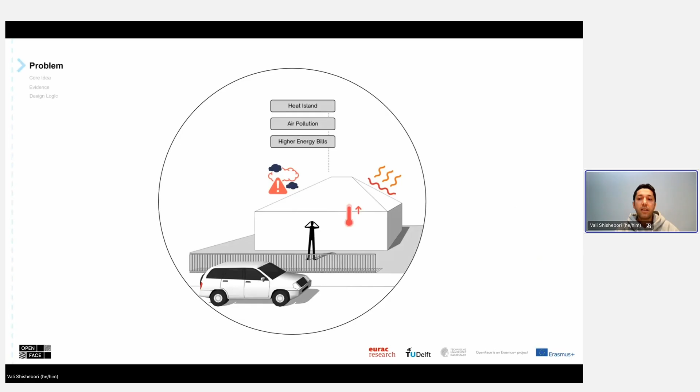This diagram illustrates the core concept. I propose the front yard as a living environmental buffer zone positioned in front of the facade. Vegetation is not only landscape, but an active environmental layer that modifies solar exposure, airflow, pollutant transport, and the near facade microclimate. The concept is informed by both field measurements and environmental simulations across the street, yard, facade, and indoor. This reframes vegetation as part of environmental performance, not just aesthetic.

To evaluate this, I used validated ENVI-met simulations, comparing vegetated and non-vegetated conditions. The results show a clear reduction in facade surface temperature, along with lower shortwave radiation and sensible heat flux. This improves the thermal conditions around the building and supports better indoor environmental performance. More detailed results are available in my published indoor air study.

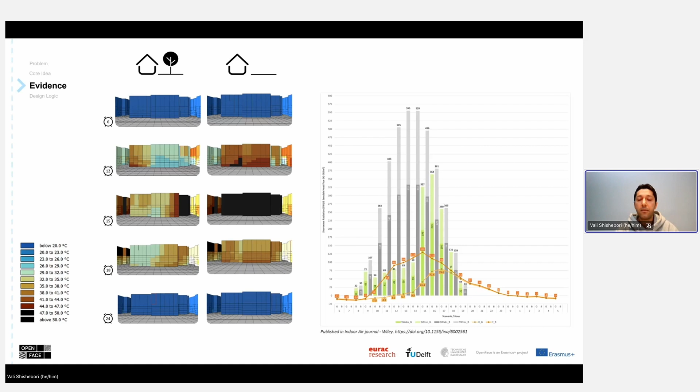Finally, the concept translates into design guidance. Vegetation strategies should respond to orientation, solar exposure, prevailing winds, and local microclimate conditions, allowing different configurations for different yard directions. Overall, this research suggests that facade performance is not only determined by the building envelope, but also by the environmental system surrounding it. And that's it. Thank you.

Okay, this was less than 5 minutes. Do we have questions for him? Any questions? No questions. How do you relate this to your climate, to your local climate?

Actually, in my case study is in West Melbourne. So the prevailing wind and the sun exposure are the most important climate conditions here. I just simulated the house facing the north side, because the most solar exposure will be in the north, as we are in the southern hemisphere.

I think that the sun and the wind are the most important microclimate factors here.

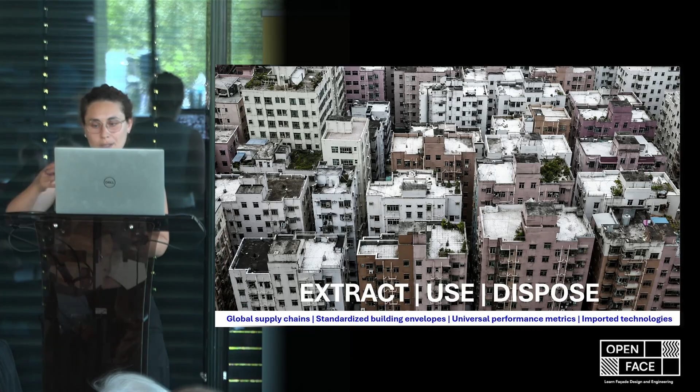So my question becomes: what if, instead of extracting building materials, we could grow them? This is where my research begins. My work investigates how mycelium-based materials can be developed through a bioregional design approach for the built environment. Mycelium, for those who don't know, is a root-like network of fungi, and when combined with organic substrates, it can act as a natural binder, transforming waste streams into lightweight, biodegradable, compostable composite materials.

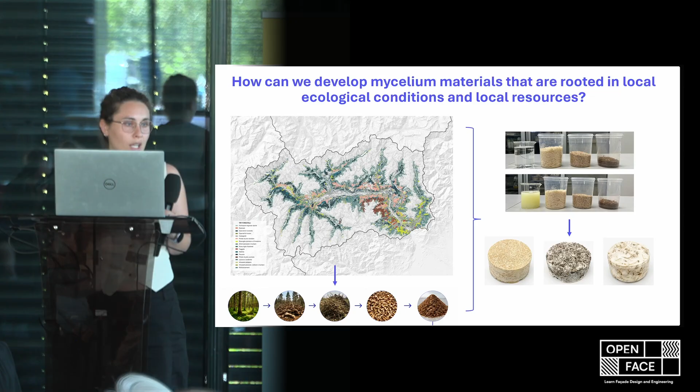Most research today focuses on material performance assessment of mycelium composites. My leading question, and the gap I was able to investigate, is how can we develop mycelium materials that are rooted in local ecological conditions and utilize local resources? To answer this, I developed an adaptable workflow for localized biofabricated materials based on bioregional design principles.

The workflow begins with material mapping at a regional scale, identifying locally available organic resources, including waste streams, byproducts, and virgin biomass. In parallel, it focuses on harvesting local fungal biodiversity through sampling and isolation of endemic fungal strains, and on finding local available nutrient sources to support fungal growth.

These bioregional inputs are integrated into a biofabrication process that includes substrate preparation, inoculation, mycelium growth, molding, and processing to produce composite materials. The outcome isn't a single material recipe, but an open and transferable protocol that can be adapted to different bioregions according to their ecological conditions, available resources, and local knowledge. By shifting focus from global material supply chains to locally rooted production systems, this approach could support circular, decentralized, and regenerative material systems for the built environment.

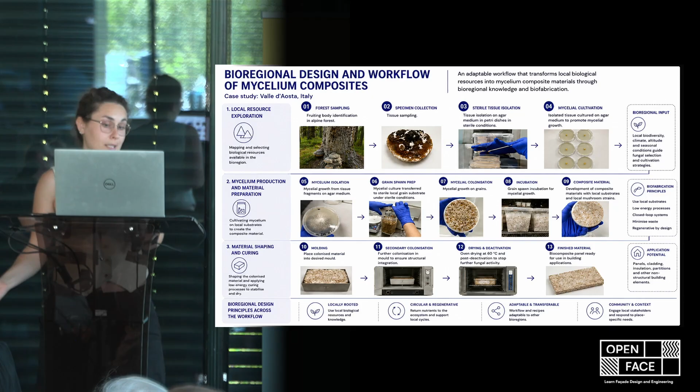I did bring some samples that follow exactly this protocol that I developed by utilizing local resources from the bioregion of Valle d'Aosta, which is in the northwestern Alps in Italy, and local fungal strains that were isolated within the lab. So these are the...

There's a question—of course, Marcel has a question on fungus. Thank you very much, very clear presentation.

I was wondering, did you already find big differences based on where the species are from? So regional differences—if you go higher in altitude or more south for the climate, do you see changes in the performance? The performance is yet to be tested.

The idea now is at the early stage of assessing that you can utilize fungal strains that are not the most researched ones in academia, like Ganoderma lucidum, Trametes versicolor, Pleurotus—also because these are always using the same strains, and they're also patent protected. So the idea to shift toward different material, different strains that you can find in local bioregions, is that you could potentially not only grow them, but also commercialize them utilizing bioregional resources. So there are some differences.

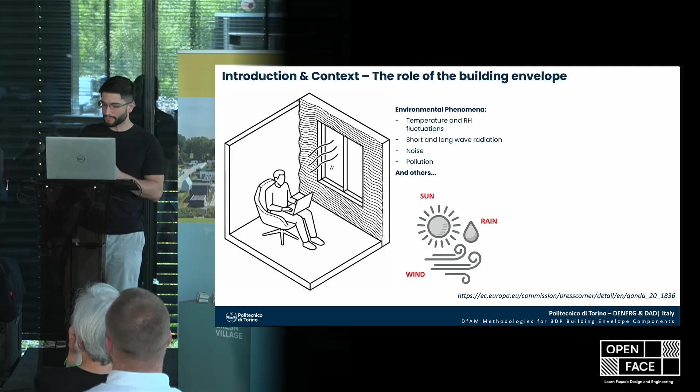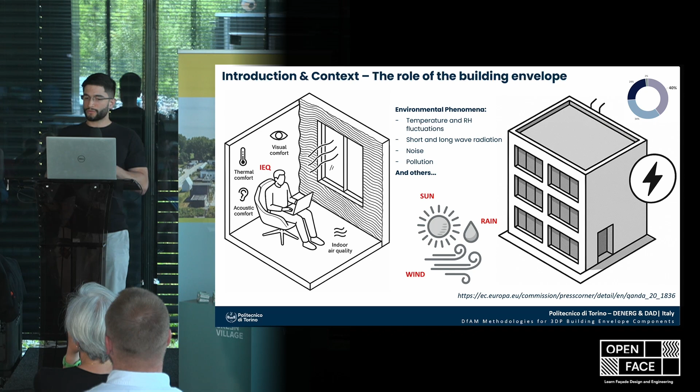In my research, we know that the building envelope is one of the key building domains, as it has to deal with environmental phenomena like the sun, rain, and wind. The way it reacts to these phenomena is very important because it will affect the user's environmental quality and also the energy needs of buildings.

Some of the most critical aspects in how we make facades nowadays is the fragmentation, because first we do geometries, then someone assesses them somehow, and in the end they consider the manufacturing constraints.

For this reason, during my research, I have been working on a free framework called Wasper 3DP, which is a Grasshopper plugin that helps designers make use of design for additive manufacturing methodologies, where you can have computational design, performance assessment, and fabrication all together in the same interface.

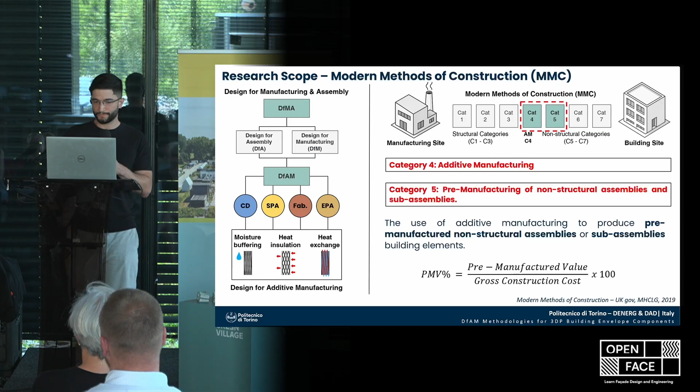So the main idea is not to have fancy shapes or new materials, which I think is important, but rather that we can give this complexity that is brought with additive manufacturing an actual purpose.

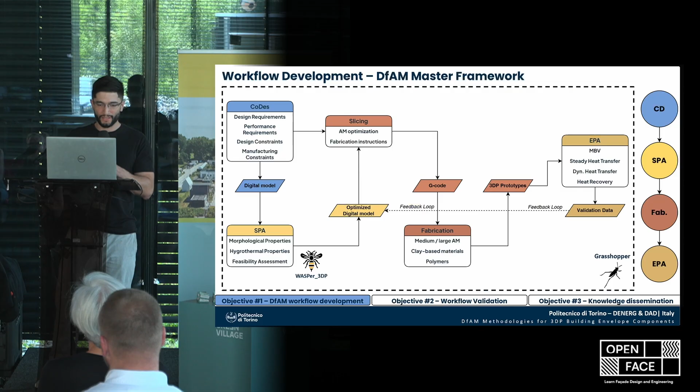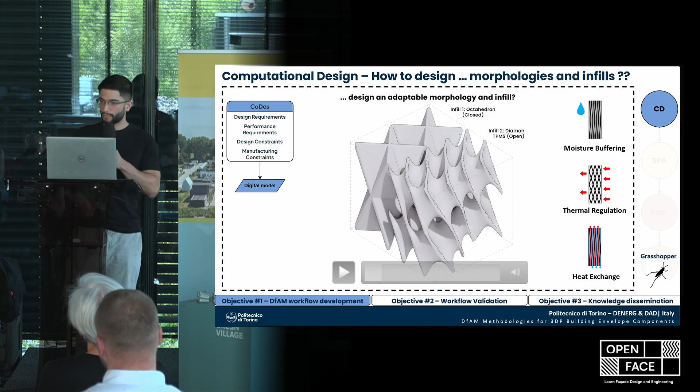Within a single interface, the user is able to manipulate complex geometries, complex infills, like for example the triple periodic minimal surfaces, which are being researched a lot nowadays. The user can also know some morphological aspects that can affect the performance of the elements, like porosity or tortuosity.

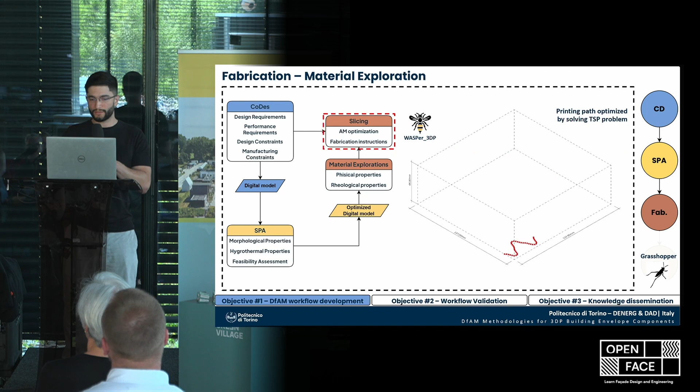In this case, the user can also use some thermal simulation methods, like some analytical and numerical methods that are embedded in the tool. And in the end, it can prepare it for the actual additive manufacturing.

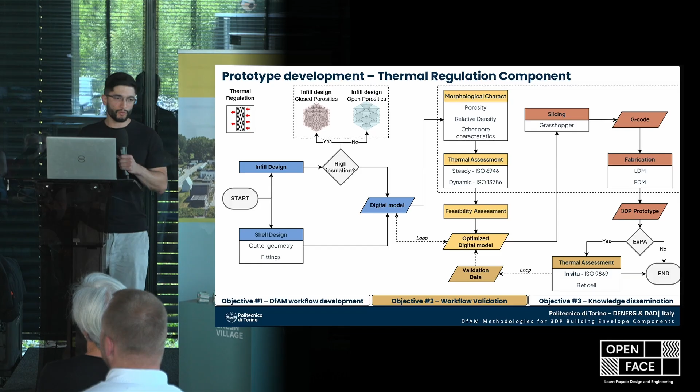Basically, the idea is to leverage these innovative technologies, which brings a lot of complexity to the table, so that we can really think about the actual key performance indicators, so we can measure the actual properties of this complexity we can achieve thanks to additive manufacturing.

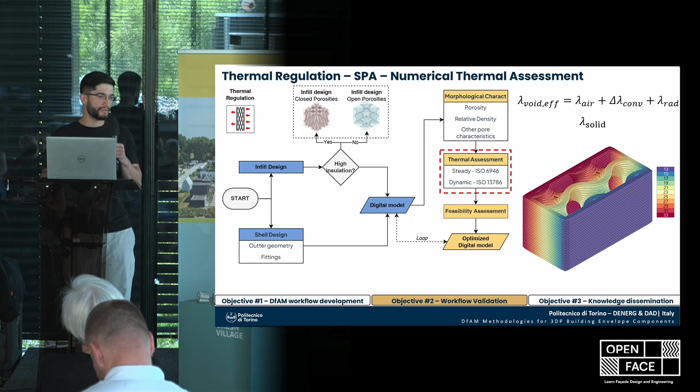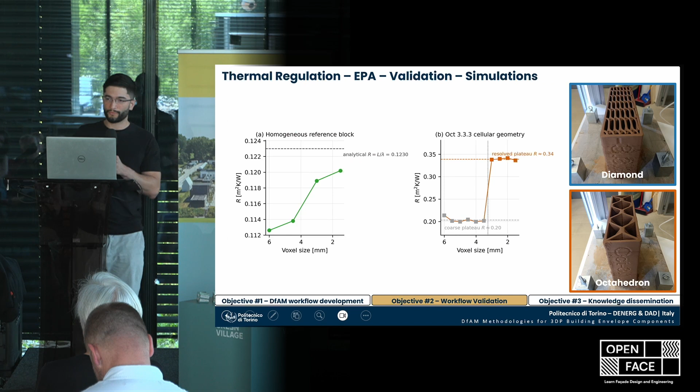If you would like to see a bit more of this ongoing framework, please join tomorrow the Food4Rhino webinar I will be giving at 5 p.m. Central European Time. Thank you very much for having me here, and I'm sorry for the inconvenience of not being able to show the actual presentation I had prepared for this event.

But thank you very much. Okay.

Yeah, as you noticed, this was a lot of information, and I have to say, I met this guy last week, and he was giving the same presentation in 20 minutes. So this is a challenge to crunch it together. Questions? Questions to him? Yes, yes, yes, yes, yes.

Thanks for a very interesting presentation. So my question would be, do you really think that through the geometry we can shift facades from being multi-layer materials to be mono materials? Do you think that we can reach that?

I think it's achievable, and actually one of the main aspects of my research is validating these methods. Of course they are limited because for the moment we have been focusing on the steady-state methods, but we're working on validating through some experimentations.

So we are making thermal measurements on some 3D printed samples, like the ones you see here. Here we have a diamond, a triple periodic minimal surface, and also an octahedron. We generate different arrays of each topological family, four of each, and we are comparing the results we're getting from the simulations against the heat flux meter apparatus, so we can further calibrate the results from the method we've been developing.

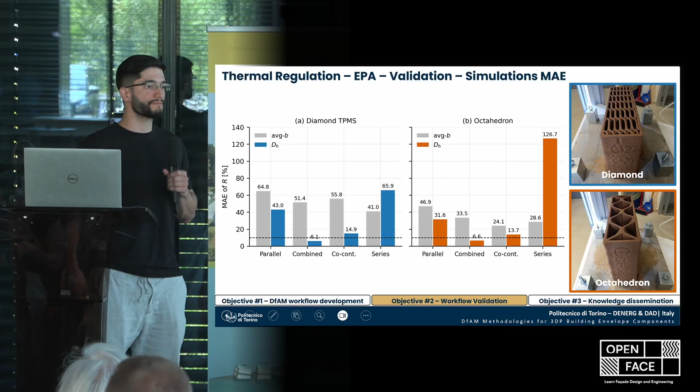Physics, structure design. No, there are so many things missing for sure, and actually that's why in longer presentations I normally frame the scope of my research up to technology readiness level 4, because there are still so many things missing, and facades are not just about heat transfer, there is also moisture and many other physical phenomena going on, so it's a very complex issue.

Exactly, and the conditions surrounding are not static. Just that for future thoughts. Also, we have to move from the steady state to dynamic state, which is way more complex.

My question is then, right now this is all monolithic, but as we do know, we like windows. So have you considered how we are going to have connections between this monolithic piece and the window piece that is theoretically out of glass or some other transparent material? Have you considered that at all? Is that outside the scope? It's outside of the scope.

For the moment, the research is focusing on the development of opaque building systems or subsystems. But of course, if we want to scale it up, we need to think about so many things, not just how to fit the windows, but also how to attach a facade to the building, or is it going to be a facade subsystem attached to a different, bigger system? There are so many questions we still have to answer.

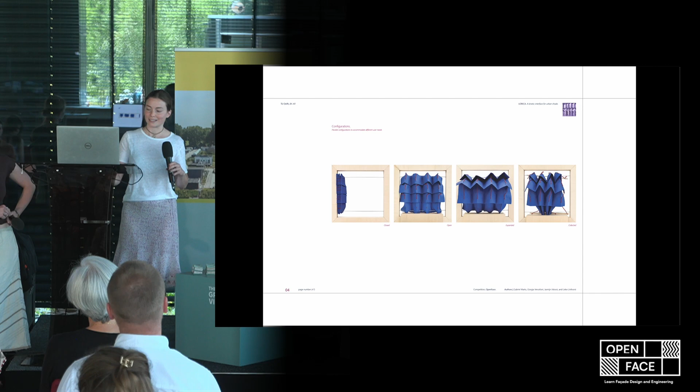The shading system itself has three strong points, in our opinion. The first is being able to be configured in very different ways, and thanks to the fact that it's made of textile, depending on the configuration, you get a more or less shading effect on the interior. We are focused on giving a pleasant experience to the user inside, also because it's documented and studied how the presence of nature and natural elements is of great benefit for human mind and well-being in general. The second element is the easy operability, especially on a small scale.

We have two cable systems, one responsible for the opening, another for the closing, and it tries to emulate, also in the dynamics, the armadillo skin.

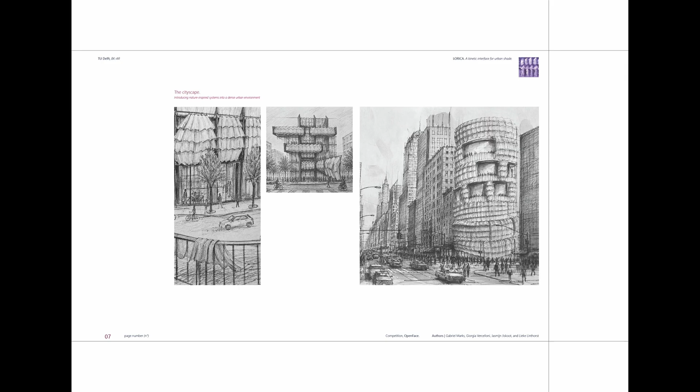Third one, the most important for our course especially, was the biomimicry - the idea of remembering and recalling the movement and aesthetic of the armadillo, both on a static and dynamic aspect. So we tried to imagine how the system could exist inside the urban environment, still going back to the benefit it can have to the mind, and how in a very dense urban environment it could behave and merge. We have some sketches trying to understand the idea it could give.

To realize this, we stepped into the technical part, and decided to propose a larger scale model. It needs to be controlled mechanically, so we have multi-carriage railing systems that are motorized, hosting both the anchor point responsible for the translation of the textile and the two cable systems controlled by cable winches responsible for the expansion of it.

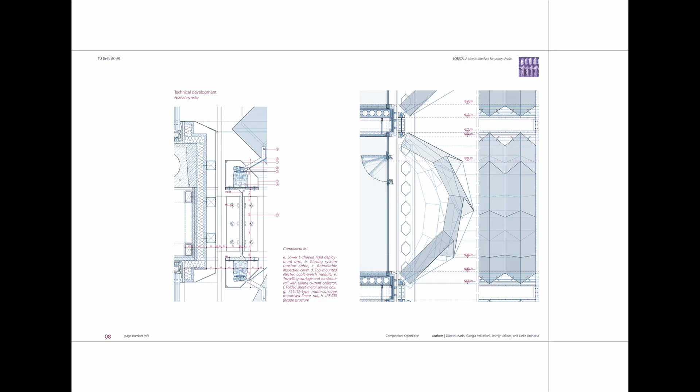Lastly, what is most important for us is the feeling that our Lorica system could offer to the interior space. So we realized a small model that gave us render-like pictures to see how the shading is different from a normal shading you could obtain from a textile system - for example, the one hosted in the architecture building right now.

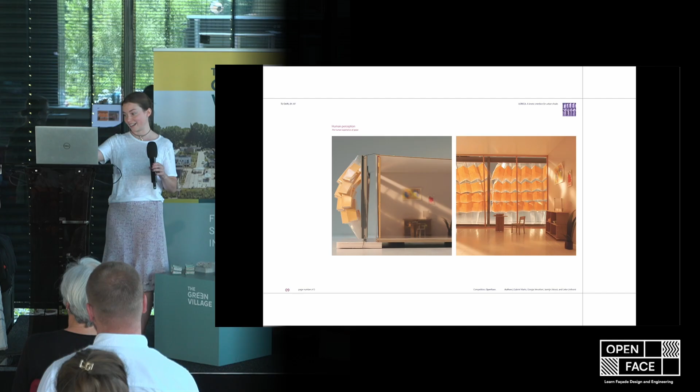Thank you so much for listening to us, and that's it. That's our Lorica.

Oh, again. It's everything. No, it's everything very, very interesting. So it caused a lot of questions.

Thank you for the presentation. I was wondering if you had any thoughts about one of the aspects related to the deployment of external shading, also lightweight ones, which is really their usability connected to high wind loads, and whenever you have a little bit more than a certain wind velocity.

Yes, absolutely. One of the next steps, if we wanted to develop this further, is to really understand how to deal with the elements - both rain, in terms of which kind of textile should be chosen, because the market offers a lot, but it's difficult to understand, especially without being a specialist, which textile could satisfy the mechanical properties we need to resist the shape and eventual consumption over time. About wind, it also depends a lot on the building you introduce this in, because if you have a continuous system it's easier to avoid the gallery wind effect behind it. But it's a thought to be made and to ask someone else.

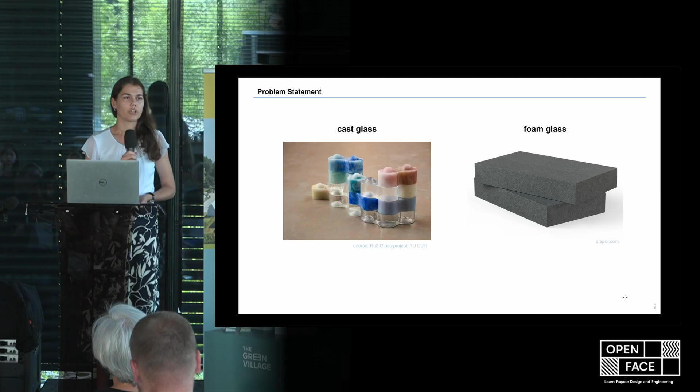However, within the same glass family, there's another material, foam glass, which on the other hand has limited structural capacity, but performs perfectly as an insulating material.

And as a part of my thesis, I tried to respond to a question: how can foam glass and cast glass be combined into one fully integrated facade component, which responds to modern building envelope requirements, and in particular to the thermal resistance requirement for external walls defined by Dutch building decree.

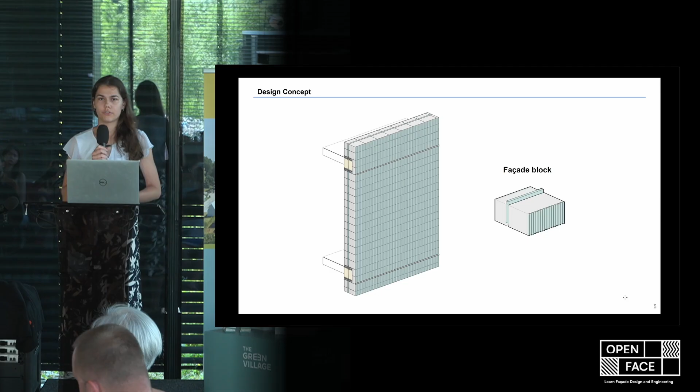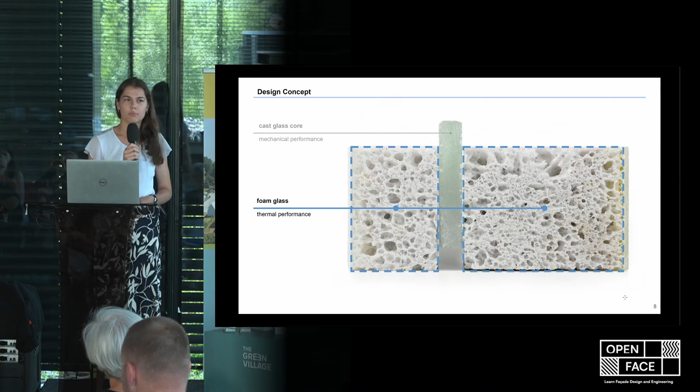In order to respond to those needs, I propose a facade assembly from identical facade blocks relying on dry assembly. Each block is composed of layers of solid and foam glass, where the cast glass core provides the mechanical performance and ensures the connection between the elements. The foam glass provides the thermal performance, and finally the external fused glass layer protects the panel from any damage.

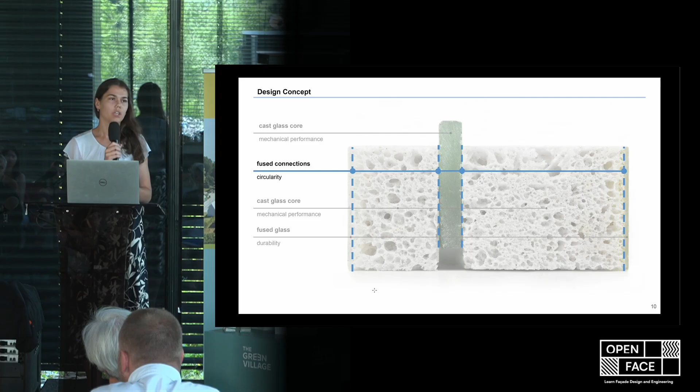The circularity of the panel is ensured by the fused connections between the elements, which allow the panel to stay fully glass-based. The most important aspect affecting the thermal performance of such panel is the quality of foam glass.

During my study, I tested various combinations of foam glass from different glass waste, and the best performing one was the one made from light bulbs foamed with calcium carbonate.

With the conductivity value that I achieved, the whole panel would need a thickness of 40 centimeters to meet the thermal requirements. Following this section, the panels would then be assembled with an interlayer in between, which accounts for any imperfections, tolerances, and also reduces the stresses between the elements.

And the whole system is supported by a steel and aluminum frame, which compress the assembly into full wall.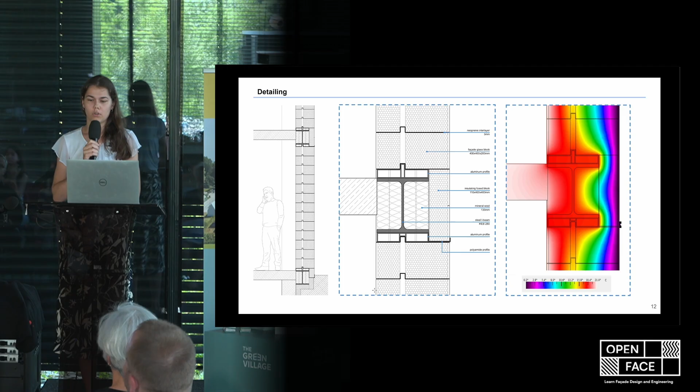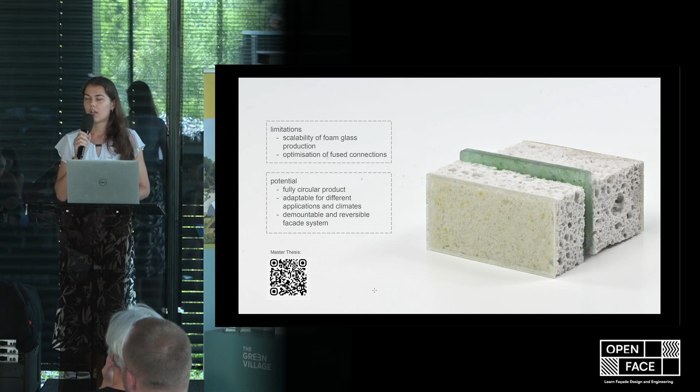There are still multiple questions to be answered, in particular in terms of scalability of foam glass, optimization of connections between the elements, but the layered assembly also offers the potential to create a solution which can be adapted for different climates and applications, is demountable and fully circular at the end of its life.

Thank you for your attention.

Come on, you have a question. Yeah, of course.

Thank you very much for this research. It's very inspiring, it's nice. Do you think there is a chance that we can make transparent foam glass at a certain point, or at least translucent? I think you already moved from the ugly black foam glass to a more appealing one. You found it's aesthetically already very appealing. But do you think there could be a next step that we could have some opaque light translucency on the horizon?

I think it's very challenging. Some of the colleagues who worked at the same time with me in the laboratory, they tried, but we mostly see an obstacle that it first of all has to be very thin, because a thicker assembly usually doesn't allow for any level of translucency, and it's still a challenge. It mostly turns out opaque. I would say there's a problem by the surface not being flush, so plan parallel transparent glass, and that's an issue.

I'd like to have a question as well. Do you really need that piece of solid glass in the middle? I can stand off something like this. It's not going to fail.

I broke it. Okay. So for the... okay, too much. Come on, you're all going to remember this moment. For sure, I apologize.

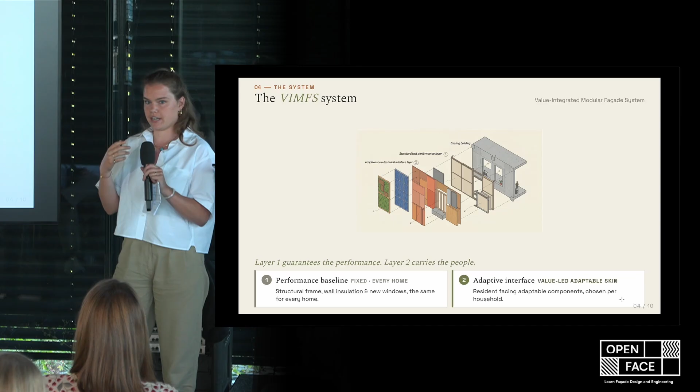So this method is then configured into this modular facade system, where you have layer one, which I call the performance baseline, which secures the performance of the building. Everybody gets the same baseline with specific structural frame, insulation, and new window. Then you move to layer two, which is the fun part, because that's carrying the people, that's adaptive and responding to the different value priorities. So this is the two-layered approach.

So layer two is adaptable, I say, but it's not unlimited customization, because there's a bounded component catalog, categorized in different value clusters, where you can choose components from. This still gives the resident a voice, but because it's bounded, it's still buildable at scale, because it's a modular facade.

And then the workflow you apply to this method is 4 steps. First you listen, then you translate the values, then you design with this modular facade system, and then you compare it, so that the value you gather with the engagement stays traceable till the design.

Then you have the method. This is an example of how you can configure it. It's a building in Rotterdam. So layer 1 secures the performance, but layer 2 shows the different value priorities.

So someone living on the top may say, oh, I want more daylight control, which results in comfort. So it's giving her more choice for sun awnings. Well, and then maybe this is a more climate-aware household. Okay, I prioritize sustainability. This can result in vertical greenery. It's all different choices.

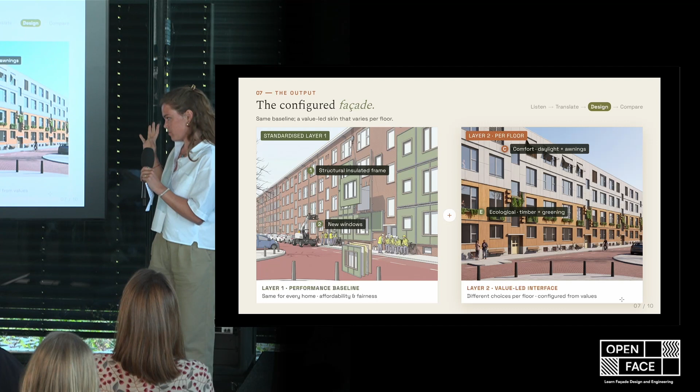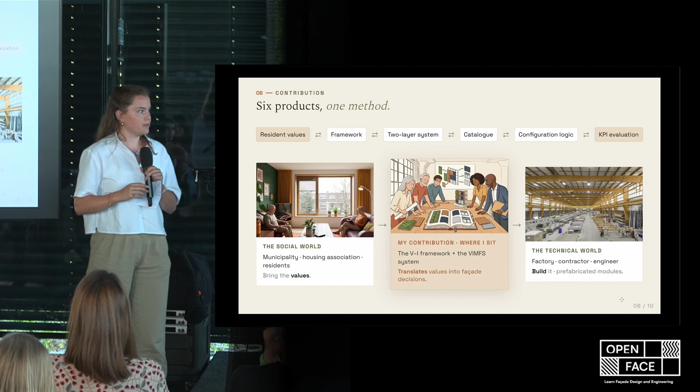So coming to the end of my contribution, it's not one facade design, but it's more about the method, creating a traceable chain where you can find the value from the start of the process to the factory, trying to gap these two worlds together, because they rarely meet.

So that's the ending, designed with, not around, because yes, the room may be experienced warmer, but it's about listening to the people actually living with it, so you can trace it back to what they valued. Thank you very much for your attention, and I'm happy to take questions.

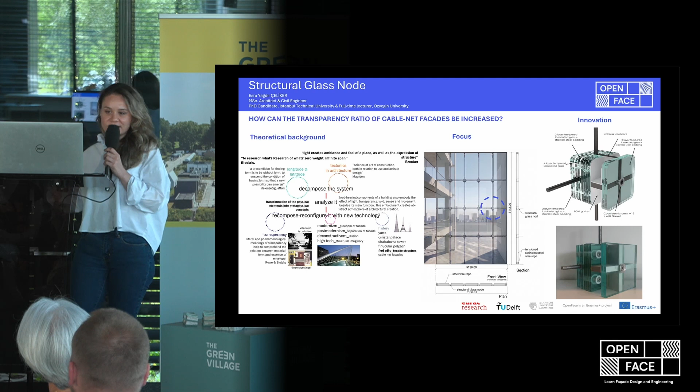The research question is how we can increase the transparency ratio of cable net facades. As we know, cable nets have a really high transparency ratio, but can we make another innovation by regarding some theoretical background? Every engineer dreams of zero weight and infinite span, so how can we make it? We were just working on it.

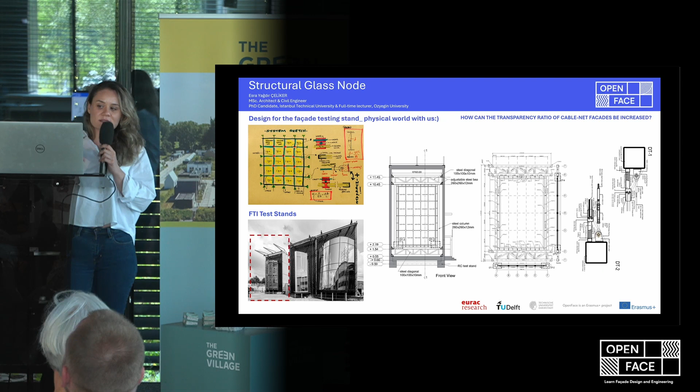In order to do that, this is a structural design and architectural design integration. We first needed to design a test stand for the cable net facade, located in Istanbul, the FTI Facade Testing Institute. According to this reinforced concrete shell, we made all the details and shop drawings, starting with my sketch.

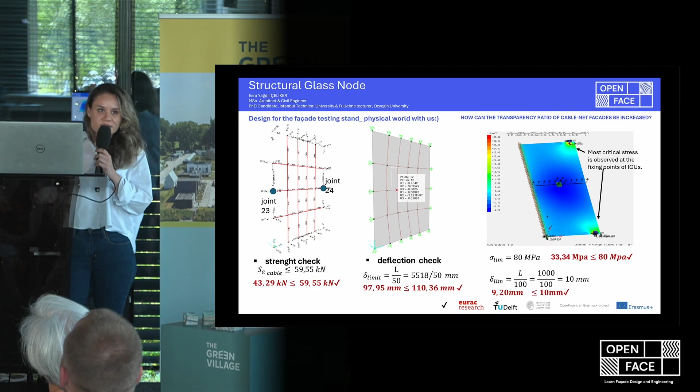Afterwards, we made a finite element analysis to understand the reaction forces implied on our structural node. Then we focused on how we may transform stainless steel clampings and point fixing nodes into a laminated and tempered glass system and node. In that case, only the core of the system is stainless steel, but the rest is a glass-made node component.

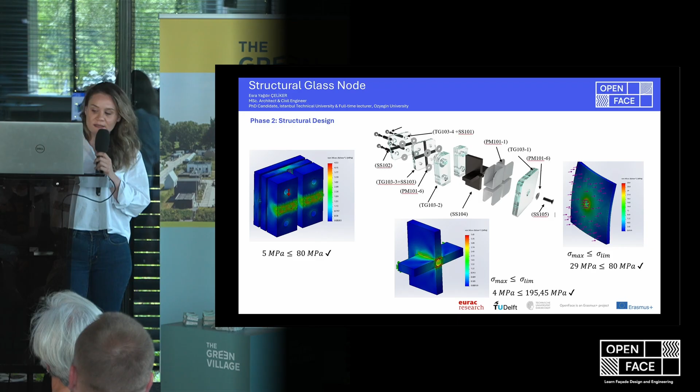Of course, we did all the structural analysis, and as you can see, all of them seem safe. Afterwards, according to the results, we went into the prototyping process, beginning with 3D printing at 1:1 scale. Then we did autoclave processes and all the rest - it will be real harsh testing.

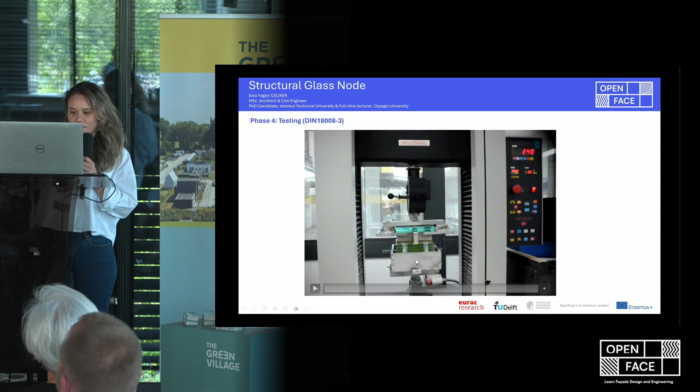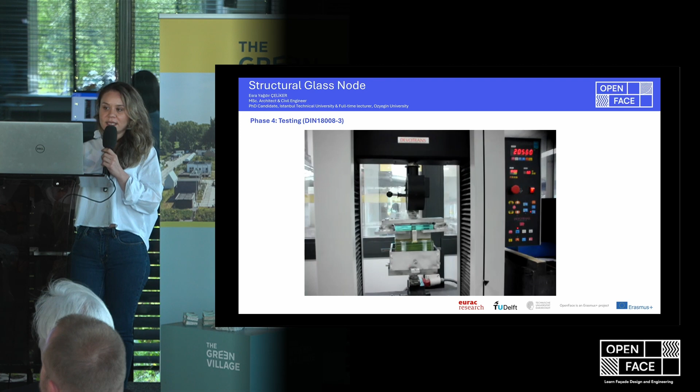We were testing two materials: one is a silicone-based adhesive, between the metal core and the glass parts, and the other is an acrylic-based adhesive. So we made some tests - there's a video here - making a tension test at an independent test facility to determine their real strength. Right now it's going to the break, yes, something like this.

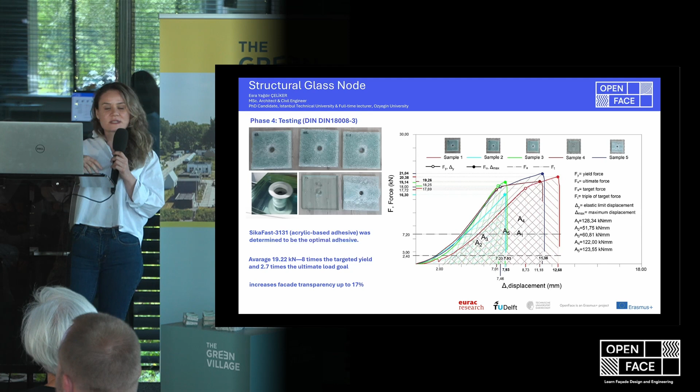Afterwards, according to the results from 5 samples tested, 4 of them failed at the break, and 1 had some kind of bolt failure at the junction - there's a stripping effect there. All the failures show that the acrylic-based adhesive has much higher performance compared to the silicone-based one. As you can see, the average strength is 8 times higher than the target dimensioning of the glass node.

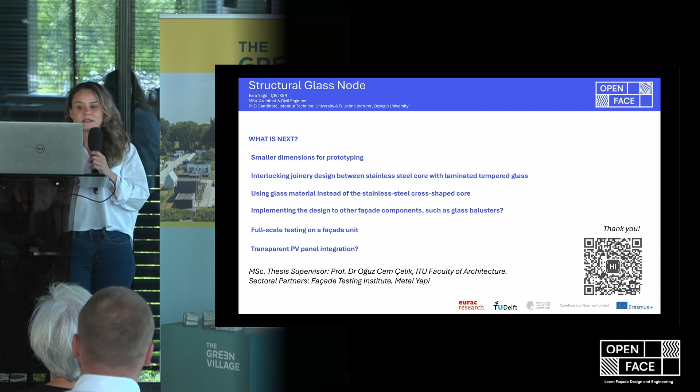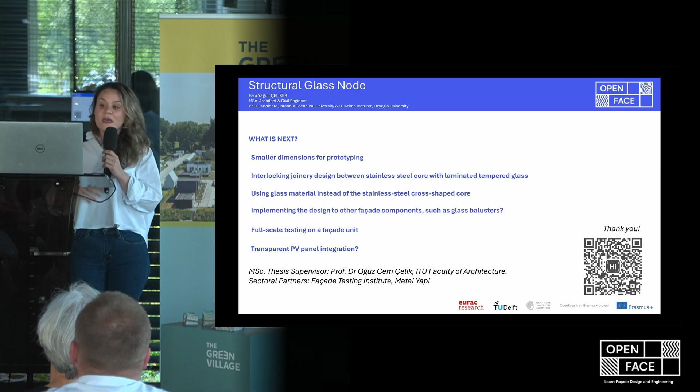So there's a question about what is next that I'd like to share. Maybe we can prototype at a smaller dimension, exploring an interlocking joinery design between stainless steel and laminated tempered glass parts. We could remove the stainless steel and consider tempered laminated glass as the core, using it as a glass baluster. It would be nice to do full-scale testing as a facade unit, and what about putting transparent photovoltaic systems into this idea? Thank you for listening.

Thank you, and obviously there are questions, and the glass guy has to ask something since you're the glass guy. Well, thank you, very interesting. In your scheme, could you go to the slide with the 3D layout of your node? Where does the glass panel of the facade sit? Just a clarifying question. Second, could you briefly explain the load path of the transfer of forces to the cable?

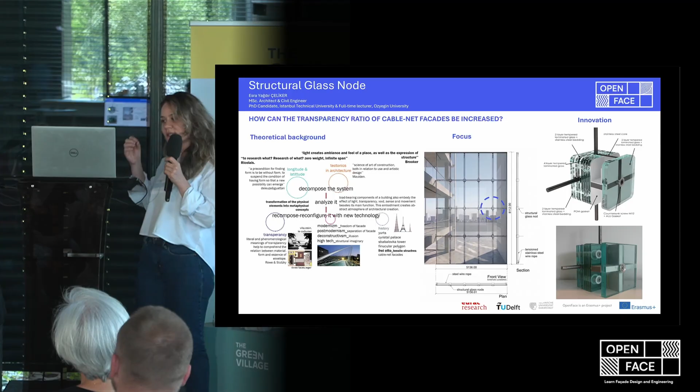Maybe it's nice to go back. Yeah, that one. Over here there's a glass glazing unit, and in the middle of the four glazing units there's a clamp, a point fixing clamp. Mostly in this sector and market, it's stainless steel. We're removing all the stainless steel parts except the core of the system, like a cross-shaped core. Afterward, we put the cap profile, or cap flat part, which is tempered and laminated, and the rest is also tempered laminated.

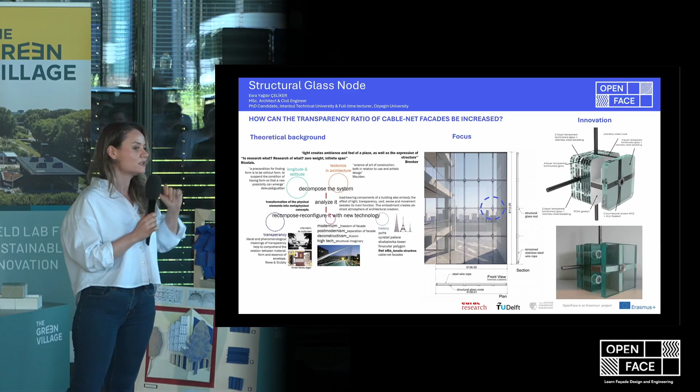I'd like to add that dimensionally it seems a little over-designed, because there were manufacturing limitations in Turkey. It could maybe be 10 by 10 or 7 by 7 centimeters, but it's still safe for this kind of structure. So the glass sits where this device is? Yes, over here. The four glazing units are positioned over here, and of course we need some soft padding elements in between them.

The two of you are going to talk later. More questions? Did you do testing? Yeah, just for the glass node, but it would be really nice to do full-scale testing with the glazing units, I think that's the next part. And do you have any ideas, as an earthquake specialist, about how this system would behave in an earthquake? We've only exposed this system to wind load, but it would be really nice to test the earthquake effect. Okay, open question. More questions from the audience? Nope, okay, thanks.

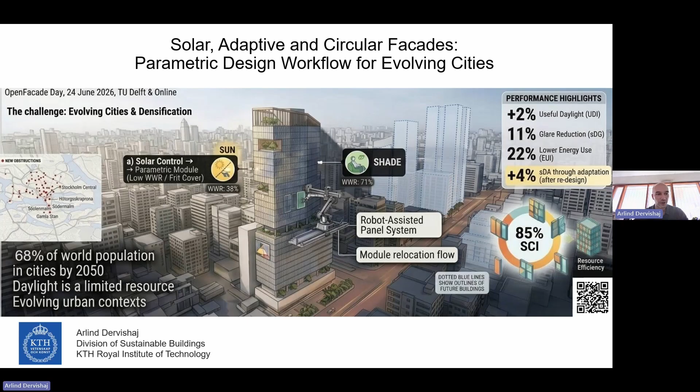As cities continue to densify, access to daylight is becoming an increasingly scarce resource. By 2050, nearly 70% of the world's population is expected to live in urban areas, and many areas will continue to grow both vertically and horizontally. As new buildings appear, they can significantly change solar access and daylight conditions for existing buildings. This raises important questions: how can we design facades that not only perform well today, but also adapt to future changes while maintaining occupant comfort and supporting circularity?

Traditionally, high-performance facades are designed to reduce energy demand and meet regulatory targets. However, facades need to do more than save energy. They need to provide occupant health and well-being, provide access to daylight and visual comfort, and remain resilient to this ever-changing urban landscape. So to address this challenge, we developed a solar adaptive and circular facade concept.

The approach integrates solar control principles in a parametric design workflow to create a context-responsive building skin. Using solar radiation analysis, the workflow adjusts facade properties such as the window-to-wall ratio, glazing frit, or solar heat gain coefficient. In areas that receive less sunlight, the facade becomes more open to maximize daylight access. In areas that are more highly exposed, the facade becomes more protective, and building integrated photovoltaics can be used more in those areas. This approach also allows the facade to maintain its design as cities evolve without losing the original design identity.

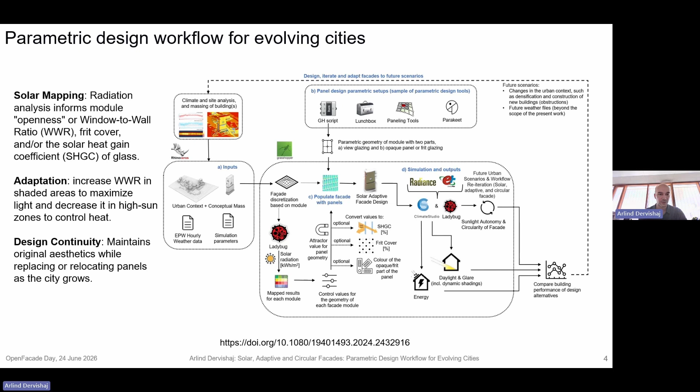This concept is embedded into a computational design workflow, integrating the facade design concept to evaluate both performance and adaptability. Here you can see some simulations that inform the distribution of glazing properties in the facade. The result is a building envelope that responds to the solar context, but adaptation is only part of the story.

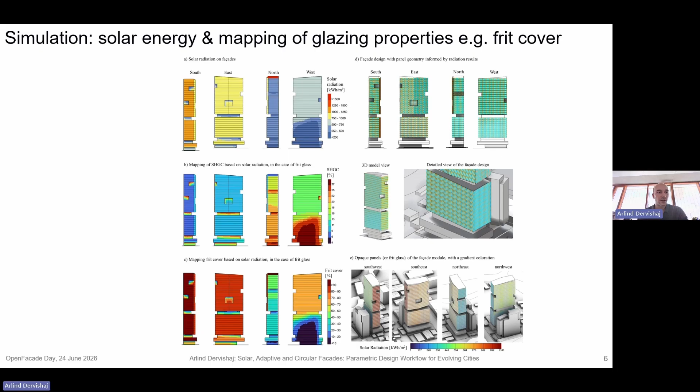So then we introduce the solar circularity indicator, or SCI, to evaluate how effectively facade components or modules are maintained, relocated, or used when urban conditions change. In the scenario when a new 100-meter obstructing tower was built nearby, the score was 85%, where 79% of the facade modules remained unchanged. The remaining part that was altered, 29%, could be used within the same facade.

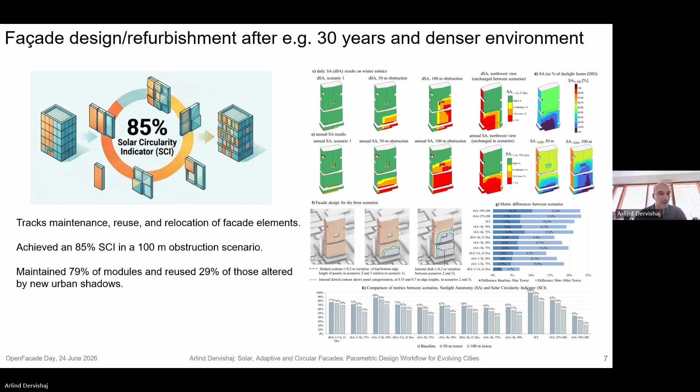Beyond circularity, adaptation is only one part of the story. This solution, when we redesigned the facade and made the change, could deliver 2% more useful daylight, reduce glare, and lower overall energy consumption. And finally, the remaining facade elements that don't need to become waste, through digital tracking and future robotic-assisted disassembly, could be reclaimed and used elsewhere within the urban environments.

So the key message is that adaptability is circularity, and by designing facades that respond to these changing urban conditions, and in the future also climate change, we can extend their useful life, reduce waste, and preserve performance, creating more resilient and resource-efficient cities. Thank you.

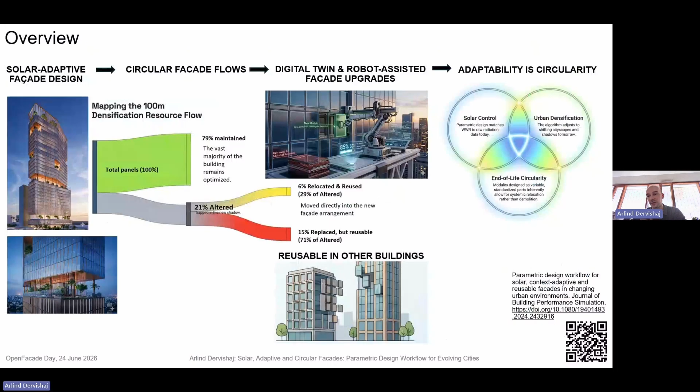Thanks. Why a robot? That was in the end of the slide, so that's not really part of the research that I have conducted. That's more part of the vision.

Okay, so I'm happy about that answer. But don't put robots in your presentation when it's not about robots, you're misleading from a very good idea already. Okay, thanks for the tip, I can copy that. We had once someone presenting a facade who said, for convincing investors, you have to have robots, and then they love it more. I'm going to ask a very mean question to you.

Where is he? This way. This is a super tool integrating everything. What did you miss? What would you add now?

What do I? And that's the point, it's an infinite problem, and you're adding all bits and pieces. And yes, we're used to structure and building physics, and now we learn to deal with human interaction.

We have a lot of advanced facade solutions, active control systems and adaptive facades, so this is not an adaptive facade solution, to make it clear. What this does is address how we can design better buildings for humans, a human-centered circularity, not just about building performance and reducing waste, but also putting the focus on human health and well-being.

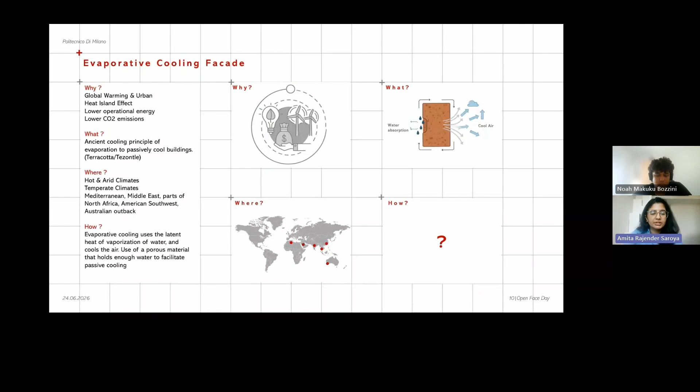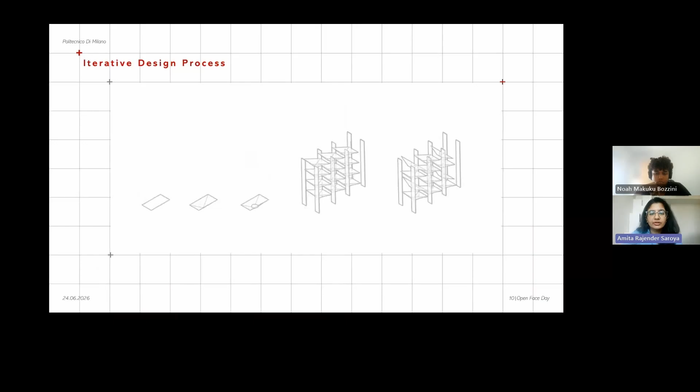Our response draws on an ancient principle of evaporative cooling. As global warming intensifies the urban heat island effect, we need low energy and low emission systems. By using porous materials that absorb water and release cool air through evaporation, we can passively cool buildings, particularly in hot and arid climates. To achieve this, we followed an iterative design process, after which we evaluated different design modules across relevant parameters. This matrix in the end led us to our final concept.

The final selected module is a simple rectangular geometry. A longitudinal groove on the surface acts as a water channel, distributing water flow uniformly across modules. Internal voids reduce weight, increase evaporative surface area, and allow airflow. The result is a permeable facade layer balancing cooling, solar shading, and daylight. It is modular, dry installed, and easily replaceable.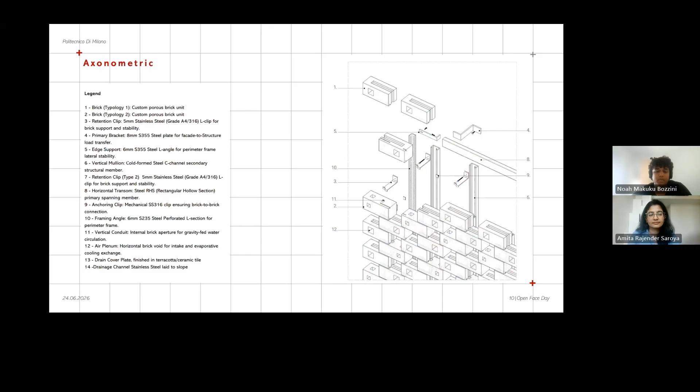In the next slide, we see the water management system. The water flows down by gravity and then is collected on the bottom and recirculated on top by a pump. Then it is collected on the top and the tank keeps the water there.

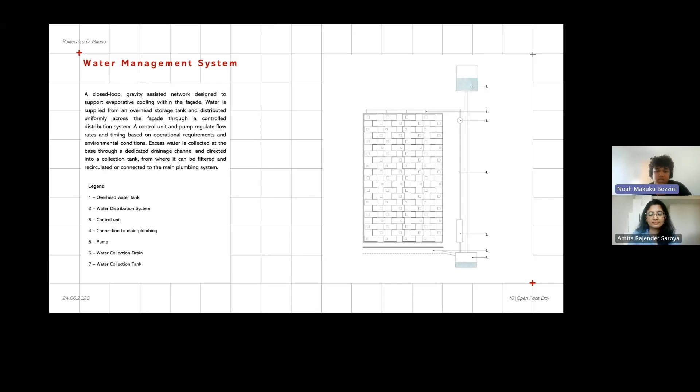The facade incorporates both low embodied carbon and lowers the operational carbon of the building while keeping good daylight performance. This is a good integrated and holistic approach in order to solve problems of today. Thanks for your attention.

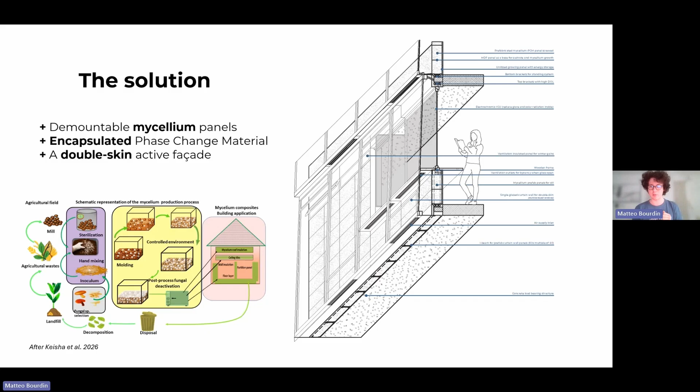This panel grows on a substrate made from agricultural waste, hemp shives, or gypsum, very suitable for the Netherlands and the Dutch context in general. Added to this, we use phase change materials encapsulated into the substrate before the mycelium grows, allowing the PCM to spread evenly through the panel. Rubitherm 22 was selected because it achieved a phase change temperature of between 18 and 22 degrees, which fits well with European environmental conditions and helps optimize charging scenarios.

But then the question is, how do we tailor the behavior of the PCM to the occupant needs and the building use? It's where the control activation comes with the double skin facade. The point is to use an adaptive double skin facade to open and close different vents to manage and enhance the PCM charge and discharge cycles through convection and radiative heat. It can also help controlling overheating in summer and night cooling through environmental triggered ventilation mode. We can also later in the stage include occupant behavior actuators that could tailor specific requirements for different rooms.

In general, conceived as a circular and energy efficient panel, they reduce embodied carbon in the building and during its operation, as well as cooling and heating needs. Driven by bioregional potential and biodegradability of mycelium, facade panel could create synergies across the region and become an innovative economic driver for the facade as a system market because they can generate bioregional return on investment. Facade contractors in this system can help grow the materials and then bring this back into the loop into their own facade product. In doing so, they could provide additional ownership value through the life cycle and make the facade more sustainable.

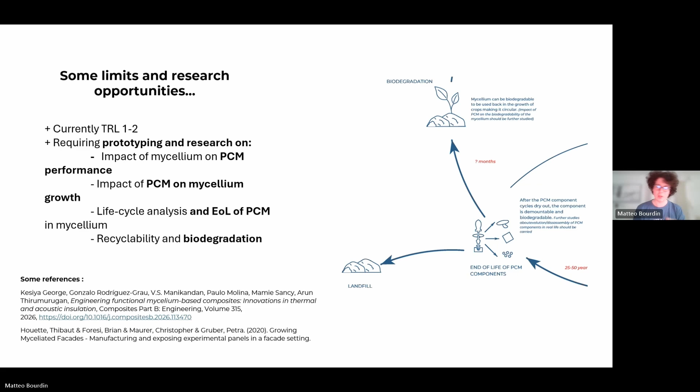The question is, would you spend your grandma's money into this company? My grandma's company, my grandma's money? Not sure. Ooh, that's the wrong answer. I need to ask her first. That's the main challenge. She needs to understand, and then maybe.

Okay, I have a question. Very interesting presentation. My question is related to the natural state of the mycelium once it is in the facade. Is it inert? Do you denaturalize the mycelium, or does it keep growing? I didn't really understand. And if so, would you take into consideration the fact that these could then potentially become molds and develop contamination, and that could also be dangerous for users because not all molds are good. Yeah, that's kind of the question.

For this specific product, I actually also during the research looked into the potential hazard of letting it grow, and I've decided to stay on the pasteurization method. So it would be inert at the end, mostly, and then be only used as a panel and biodegrade at the end, because it was the easiest way to keep it functional also in a double skin facade, combining the double skin facade and the mycelium panels. Actually, it's a subtype Trombe wall as a double skin facade, which we see here. And the mold question would actually also have been a nice one for the previous group, which is an issue.

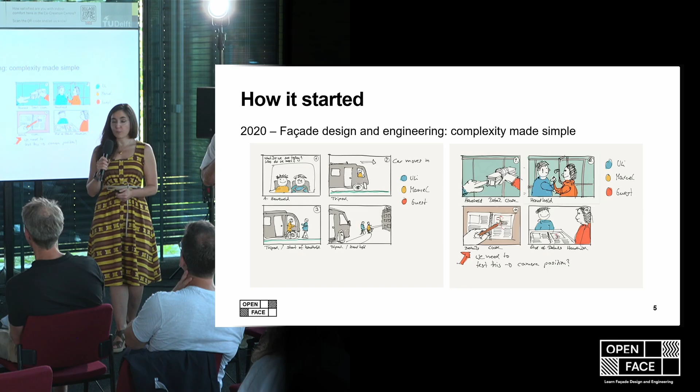Maybe we need that one slide. Okay, no, here, perfect. So actually, it was an idea of Uli and myself. Uli wanted to have a video channel - Marcel, my kids are all looking at YouTube, we need to go into that sort of medium in order to educate our students. If everyone is on YouTube watching YouTube for hours, I want to make sure our content is shared with them too. So skip the university, let's make our content available for everyone on YouTube - they watch it like Netflix.

And then Uli ran around and asked many people, and they all liked the idea, but no one wanted to pay for it. So, traveling around the world with a camper van, sharing facade ideas, why should we pay? Because everyone has to see it.

And then they mentioned we should talk to the media center about online learning, MOOCs. Bea was sitting in front of us and said, what, you just want to make YouTube videos? No, we make it into an educational program where the videos engage, and then there's learning behind it. There's a community on a platform with peer-to-peer interaction. Okay, let's do that. And it took us a while to get into that.

And Tatjana, also being here, took most of the organizational and educational program and let us loose on the camper van. We started making this storyboard where Uli and I are sitting in a camper van, driving somewhere, jumping out, and going to a building to meet someone within our European Facade network and friends who know all about the various topics we would like to present.

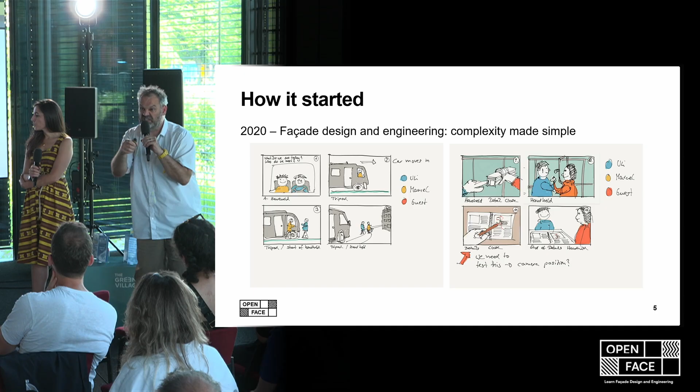And then there's Uli fiddling around, always poking with a screwdriver to get into some sort of ceiling or break something - a skill he showed today at perfection. Then we explain something, and at the very end I jump into the van again, changing from cameraman to co-driver. And that's what we did.

First time, yellow number plate in front of the Darmstadt campus. Half an hour later, the janitor arrived: there's no free camping here. I said, Uli Knaak, I'm a professor here. So what? But the camper can't stay here.

And back then we didn't think this was a start. We were happy, and we got exceptionally good critics for that, and everyone said, hey, you have to do more of that. And then Alessandra and Uli teamed up and wrote a proposal for OpenFace - 3 universities or 3 institutes - and at the very end, we got approval.

That's where we started. We sat together and thought: while the first one with the camper van was the crazy overview to get everyone interested in building physics, structural calculations, and all the parameters you can drive around discussing facades, then we came up with this course, which ended up as 6 new courses we had to develop. I'd like to share them here: Facade Design and Engineering, Complexity Made Simple - that's the one with the camper van.

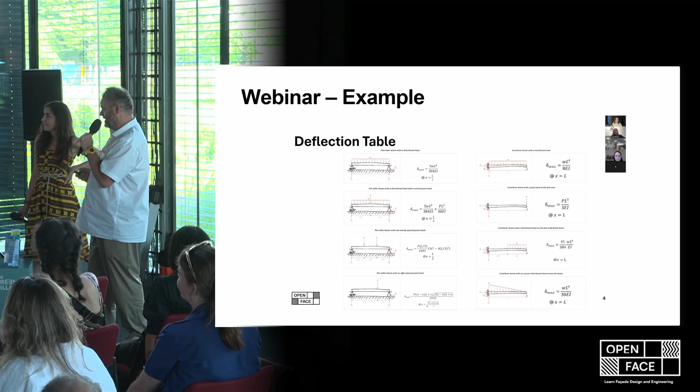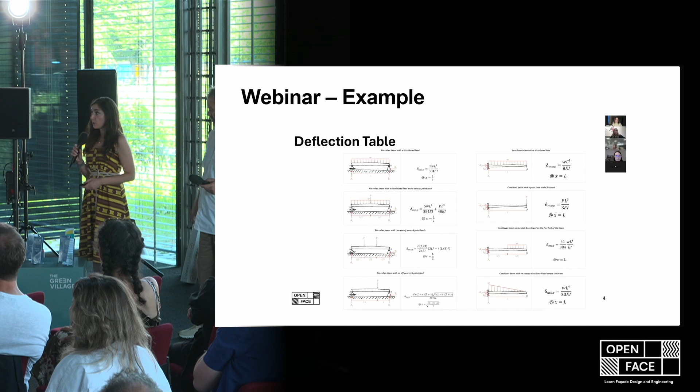And Alessandra? Some examples of the activities that take place during a MOOC. This is the activities that you experience if you join the full learning experience through edX. The students, especially in the first run of each MOOC, also get the chance to meet the teachers one-to-one, online, through webinars.

In the webinars, we go through the exercises together and answer Q&A from the students, and we also discuss much broader and larger topics that emerge from student questions on the topics of the MOOCs.

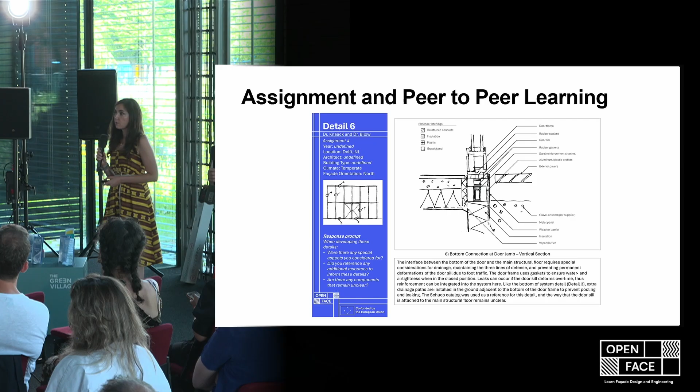Each week or every two weeks, depending on the content, we also give them assignments. The assignments are corrected by us, the teacher team and student assistants, but also teaching assistants. There's also a peer-to-peer learning experience, because the assignments are in a sort of blog setup where other students can comment and discuss each other's work. This is a nice way to create an online peer-to-peer learning community.

This is another example, before we look at an example regarding detail, but we also do this for structures. You see here a simple structural design evaluation of the structural principle of a facade.

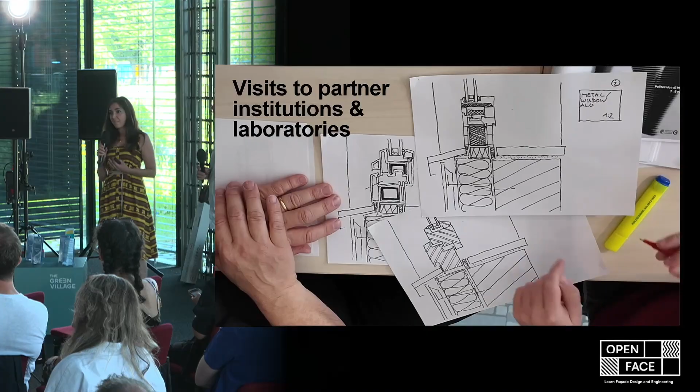And also in the videos, we curated a number of external guests and visits. We went to other experts beyond the team of institutions that created OpenFace, to ask other questions and get broader, more international expertise.

This, for instance, was our visit at Polytechnic of Milano. Similarly, thanks to the fact that Eurac is also one of OpenFace's partners, we interviewed researchers at Eurac Research.

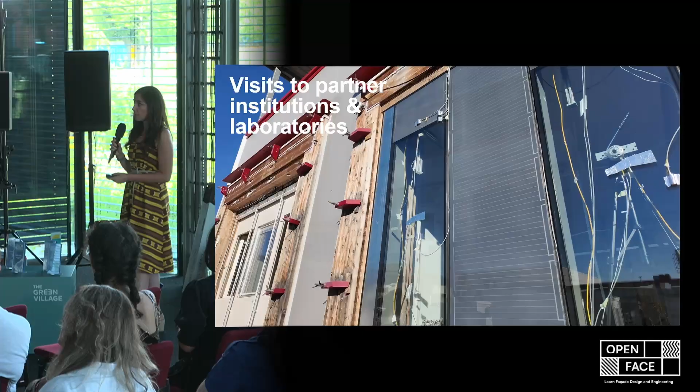We visited all the laboratories they have to test and assess the performance of facade components. And similarly at Polytechnic of Torino, you might recognize some faces here, where we visited the labs and also had a deeper discussion on luminous efficacy and the relationship between Tvis and g-value.

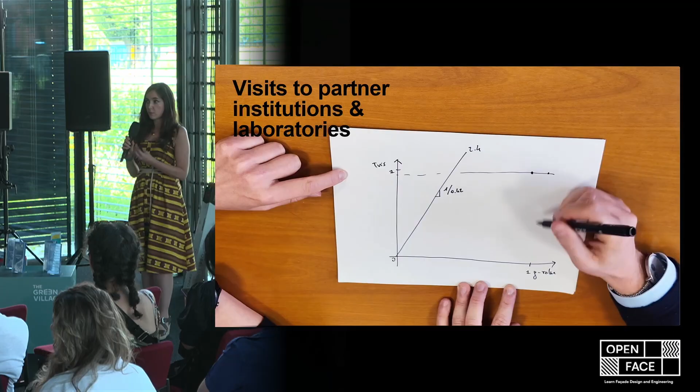These are just snapshots of the type of material you can see in the course. We go from the very basic principles to much more in-depth content around all the topics in relation to facade design: materials, technologies, performance, detailing, circularity, and innovation.

So all this material is available at openface.world. This website is open. You can access all the videos for each MOOC, and you can also find the direct link to the edX course if you want the full learning experience.

On openface.world, we give learners, other professors and teachers the opportunity to use our stuff, since that was also part of our project, to make this available. So whenever you, as a teacher wherever you teach, would like to use this, you can do so yourself, either using a few pieces or an entire bunch of it. So the university or universities all around the world can also use our content.

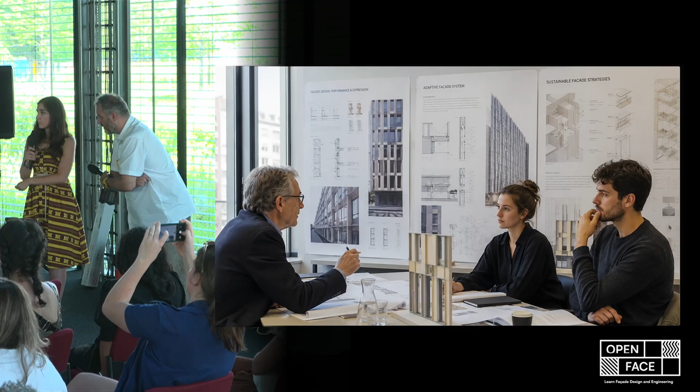How would the exam look like? It's an oral examination where the teachers, led first by TU Delft - myself, Ulrich Knaack, and Marcel - will go through all the topics and content explained and taught in the previous MOOCs, and evaluate and check that the content has been correctly learned and the learner is effectively ready for having a MicroMaster in facade design engineering.

Just to make sure everyone knows what to expect: we will ask the learners to bring a facade design they have done themselves during the courses, or within the office, and we will talk about various aspects of that design to make sure they are really into the topic - understanding the little details about choosing the right system based on logistics, building site, and climate, which influence the coating of the glass or whatsoever. So it's not a questionnaire to see if you've followed each course and remembered it, but to make sure you've become an expert able to judge various decisions based on an actual project.